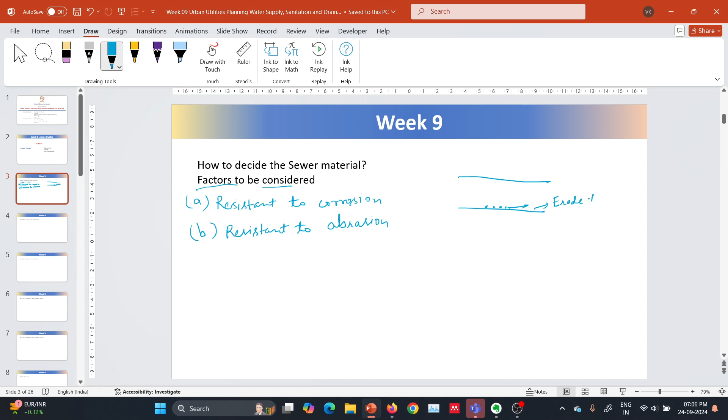resistant to corrosion, then it should be resistant to abrasion. There are two terms, abrasion and attrition. Abrasion is due to two different materials, and attrition is due to the rubbing of two similar kinds of materials. So it should be resistant to abrasion, meaning it will contain some solids, and these solids may erode the sewer material.

It should be strong and durable. Apart from that, it should be preferably lightweight, for ease of transportation. And then it should be impervious. It should have low cost. And apart from that, it should be hydraulically efficient.

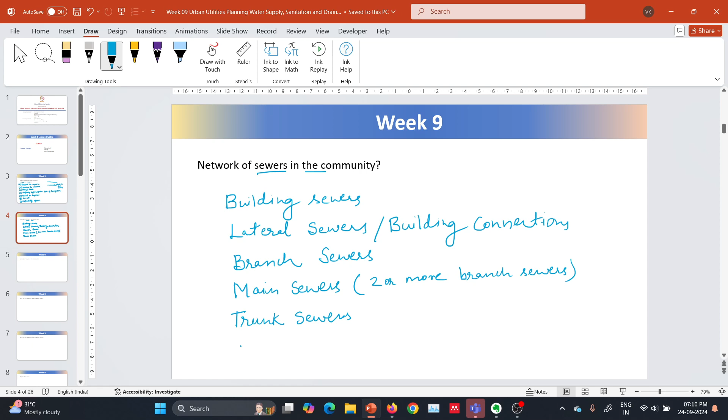The networks are like this: first we have sewers in the building, called building sewers. Then we have lateral sewers, or building connections. Then we have branch sewers. Then we have main sewers, which will connect two or more branch sewers. Then we have trunk sewer, and then they will either discharge to STP or outfall.

We can illustrate them like this: this is a house. From these households, you will have lateral sewers, also called building connections, connecting the house to the system.

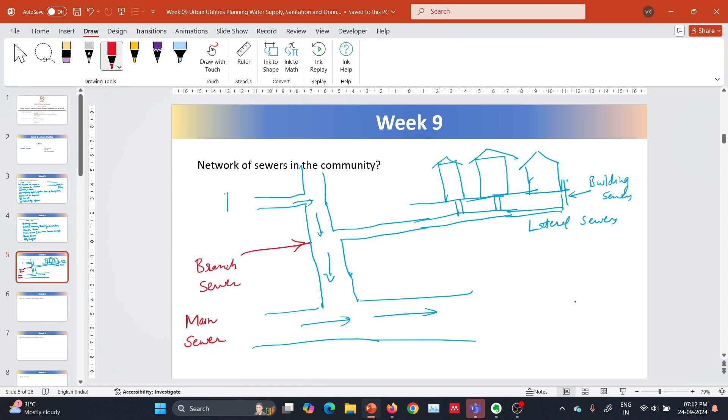The lateral sewer will actually connect to the branch sewer. This branch sewer will then connect to one big main sewer. The main sewer then transfers the content or sewage to the trunk sewer, which will discharge either to the STP or outfall. This is the network of sewers in the community - this is main sewer, these are laterals.

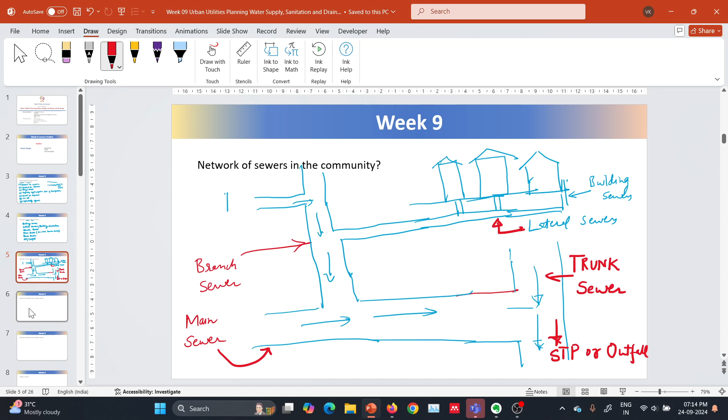Now we can move on to the next question: what are the different forces acting on the sewers? Sewers can have different types of forces. Sewers are generally circular in shape and size, and if we consider them as a 3D figure, they are cylindrical in shape.

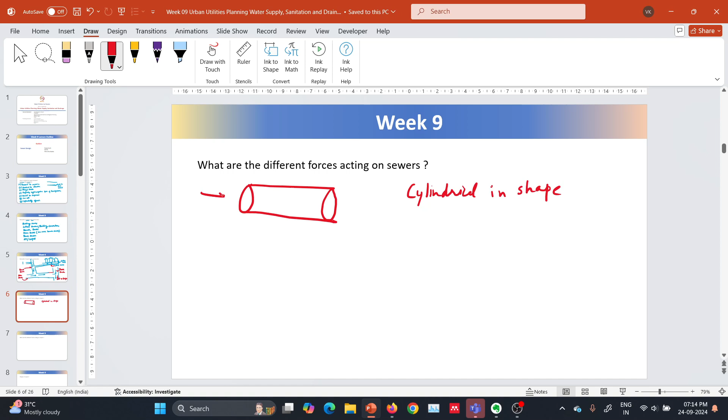So they can have internal pressure when running full. Generally sewers are not designed to run full, but due to overflow or unforeseen circumstances, they may run full and cause internal pressure. So we have to provide the provision - we need sewer material of such strength that it can bear the internal pressure due to full flow.

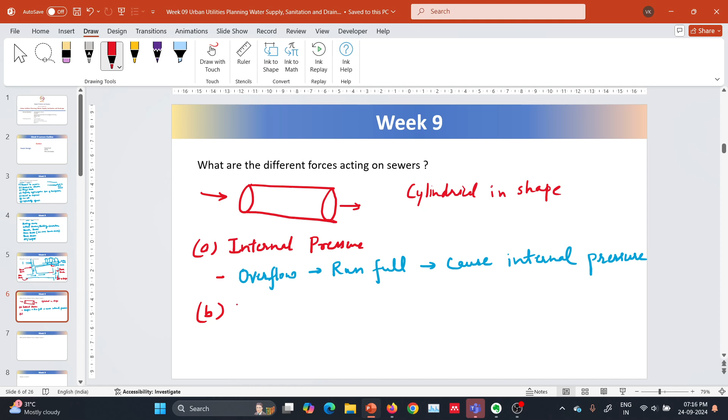The second type of force is pressure due to external load.

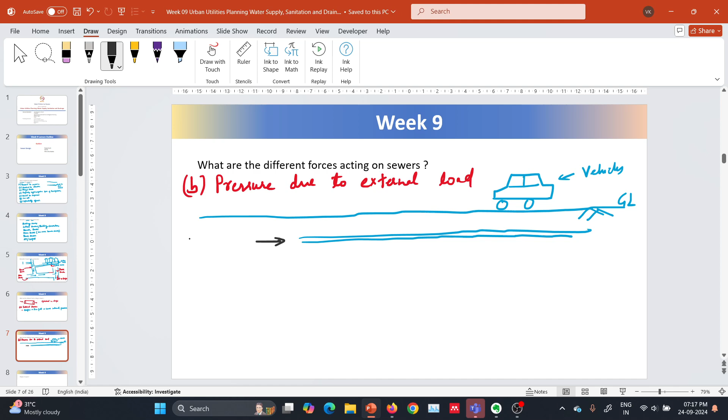Sewers are, as we discussed in the last class - this is the ground level. Here we can have vehicles, and we can have water lines above, which are water supply lines, and we have sewer lines below this.

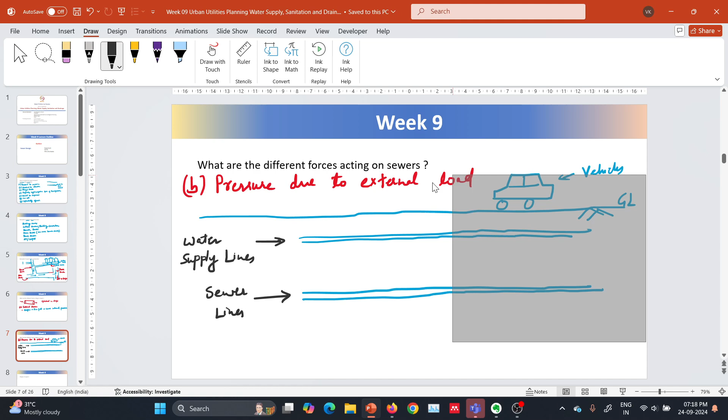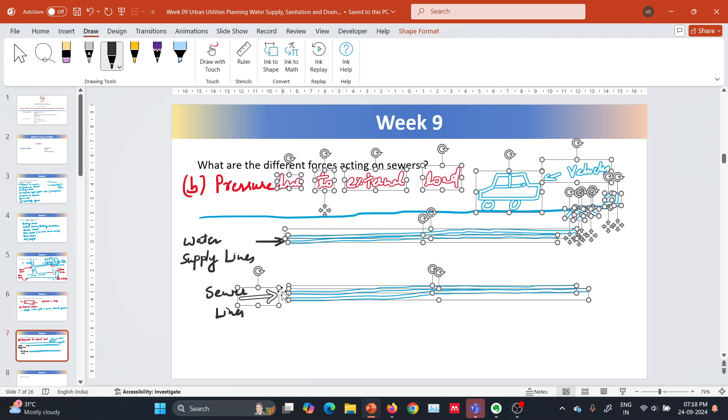So sewers have to carry loads. This is due to the earth pressure, soil weight, plus the vehicle load. So sewers have to carry soil weight plus vehicular load. Sewer pipelines need to be designed to take external load because of the soil weight and the vehicle movement.

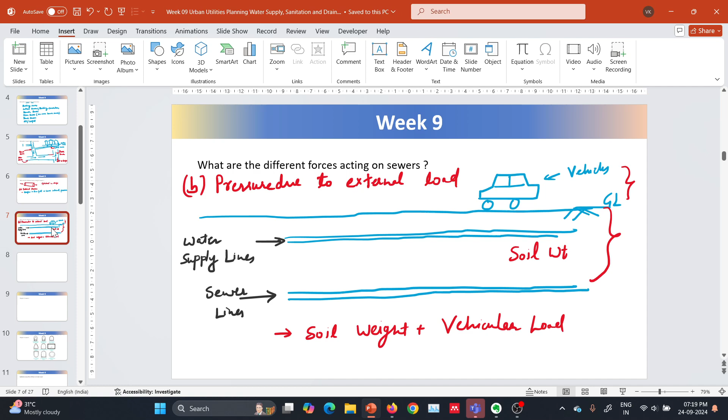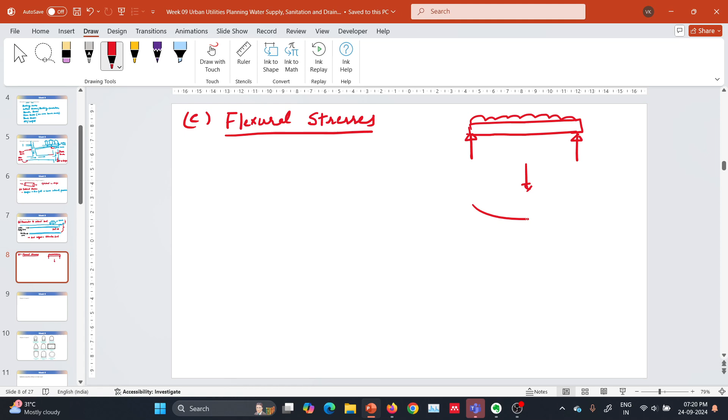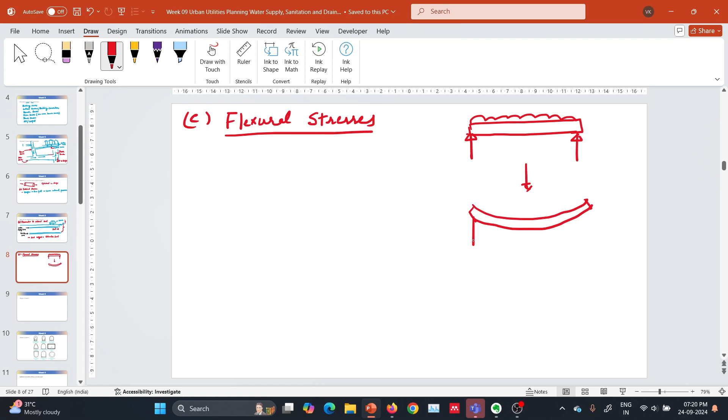We have two more stresses. These are flexural stresses. So what are flexural stresses? In solid mechanics we studied, if you place a beam with some load, it will bend like this. Not exactly like this, but very little. So it will bend.

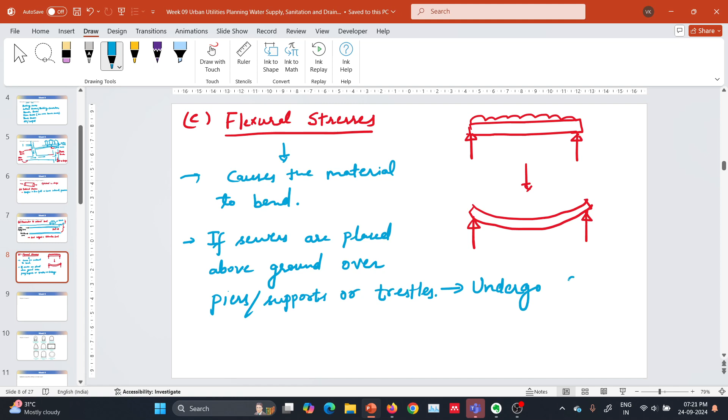Likewise, if sewers are placed above ground over piers, supports, or trestles, they undergo flexural stresses. So the sewer pipelines, they can bend, and here cracks may develop. That will reduce its life. So that's why they should be designed to take the flexural stresses if they are placed above the ground.

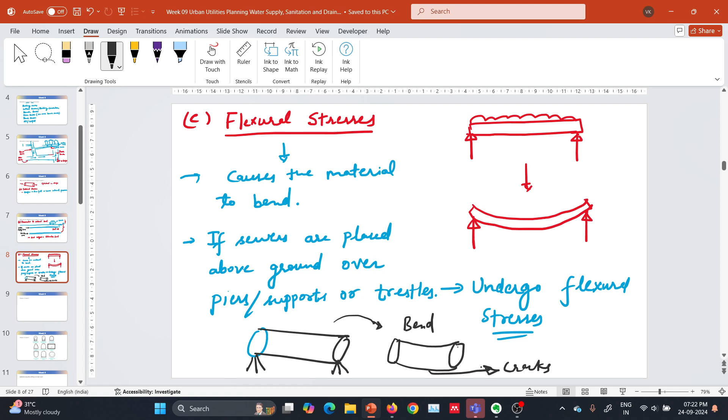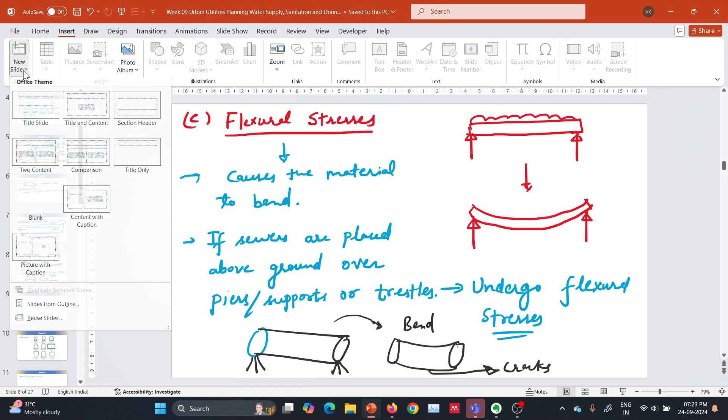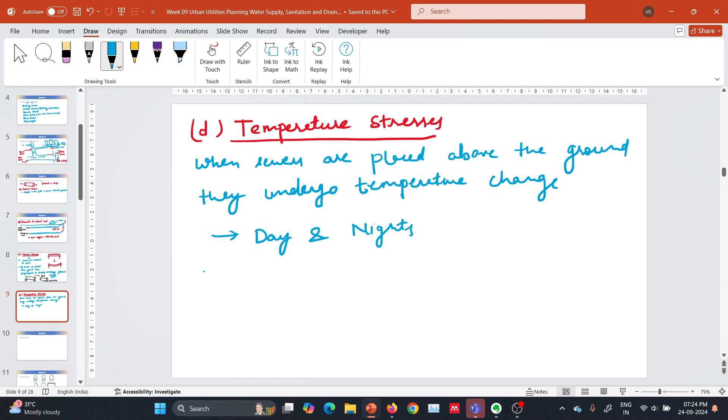So we have one more stress, that is temperature stress. So when sewers are placed above the ground, they undergo temperature change during day and nights, during summers and winters. So they undergo change in temperature, and that temperature, what will it cause?

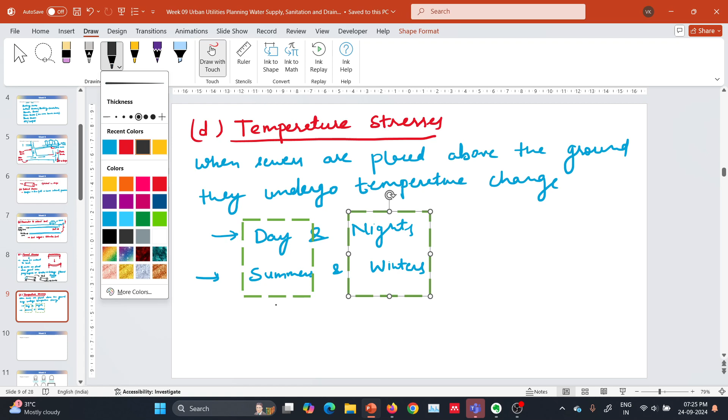So during summer they will expansion, during nights and winters contraction. So this repeated cycle will affect the material, and the life of the material will reduce. That's why the sewer material should be such that it can bear the temperature variation during day and night, and summers and winters.

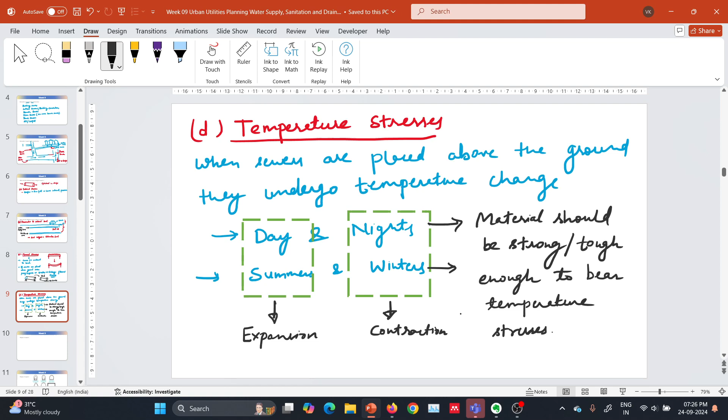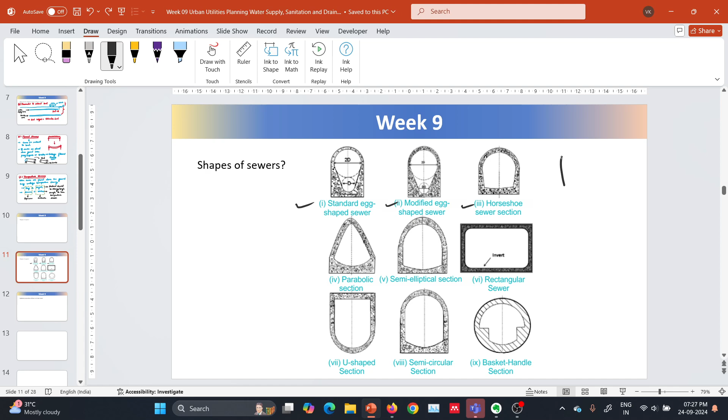What are the different shapes of sewers? We have different shapes: standard egg-shaped sewers, modified egg-shaped sewers, horseshoe sewer section - this looks like horseshoe. This is parabolic section, semi-elliptical section, rectangular sewer, U-shaped section, semicircular section, and basket handle section. And there is one more which is most important, the circular sewer.

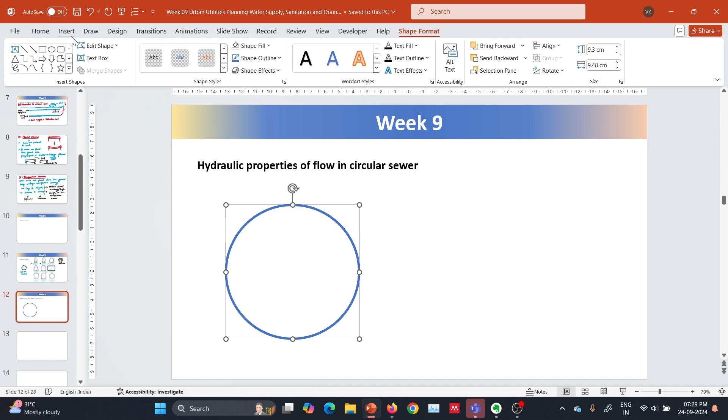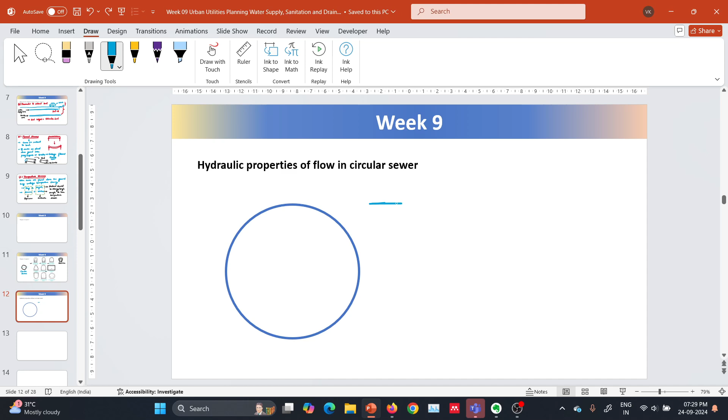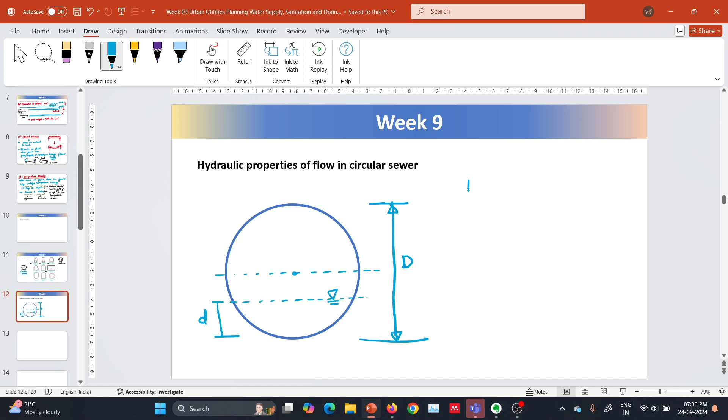Now we will understand the hydraulic properties of circular sewer. So this is the diameter of the sewer, this is D. This is the flow depth - depth of flow in sewer. Alpha is this angle, this is alpha by 2. This was D by 2, this is alpha by 2.

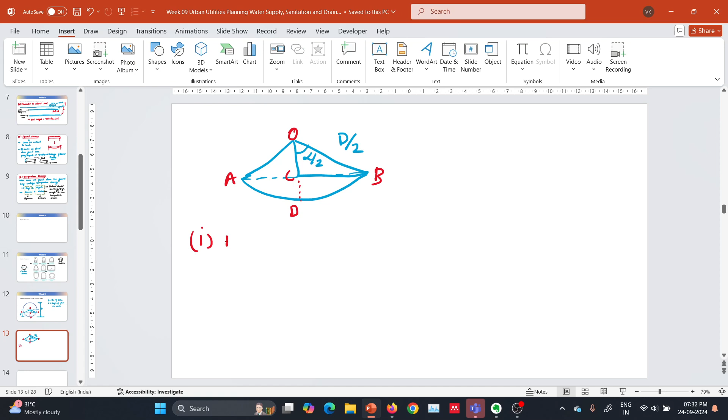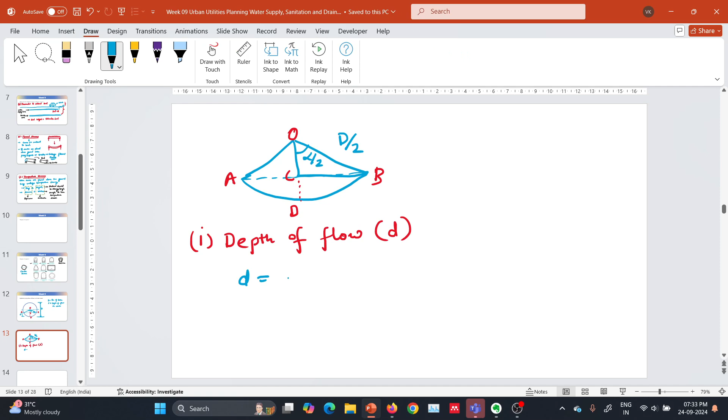So we can write these sections as O, A, B, this is C, this is D. First we will calculate depth of flow, which is d. Depth of flow we can calculate as total minus D by 2 minus OC. This d will be equal to D minus D by 2 minus OC. This is OC length.

This OC is equal to D by 2 cos alpha by 2, and CB is equal to D by 2 sin alpha by 2. So if I write it like this, D minus D by 2 is D by 2, OC is D by 2 cos alpha by 2. So here I can write d by D is equals to 1 minus cos alpha by 2, divided by 2. This is the expression for the depth of flow.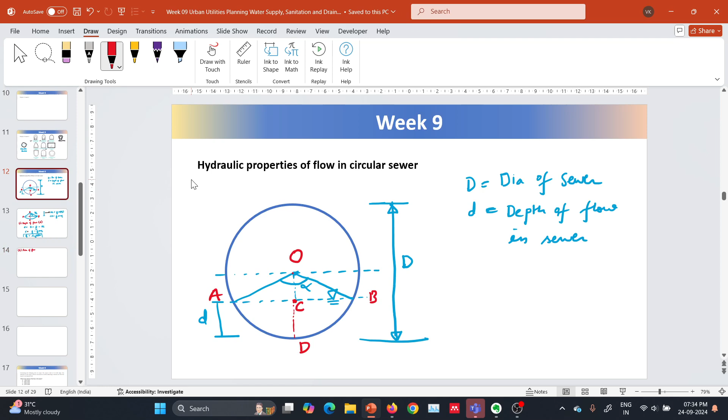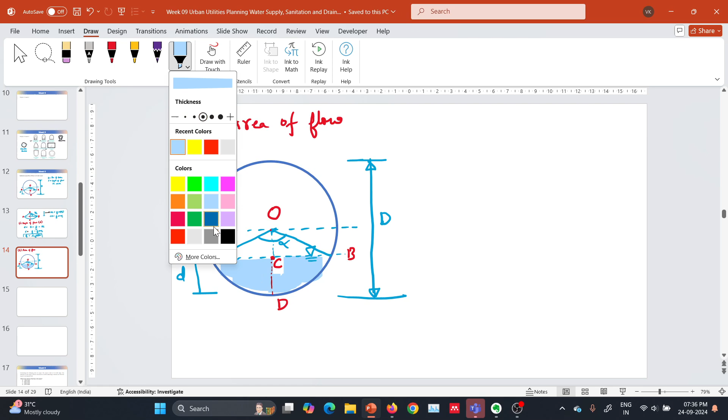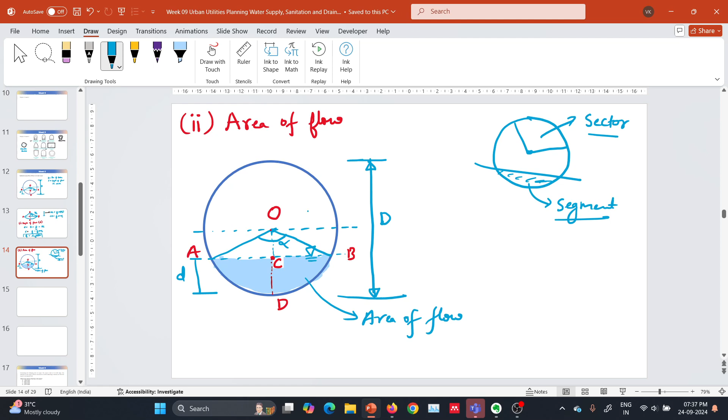Now we will derive it for area of flow. This is the area of flow. So remember two things: this is called sector and this is called segment. These are the two things we need to consider. This is sector, this is segment. So the area of sector first we'll calculate, then we subtract the area of triangle, and from this sector, if we subtract this triangle, we'll get the segment. The area of flow is area of sector minus area of this triangle.

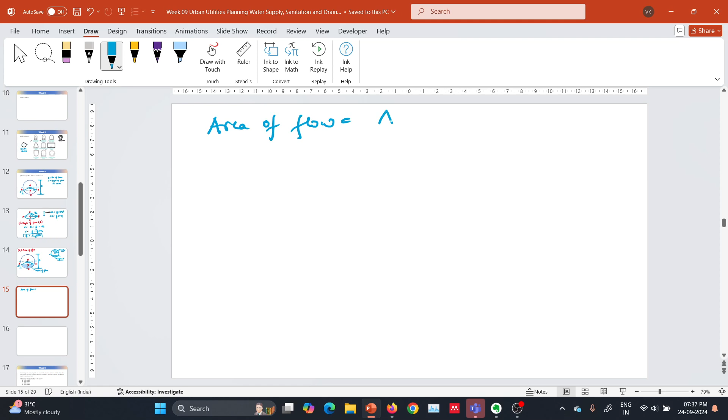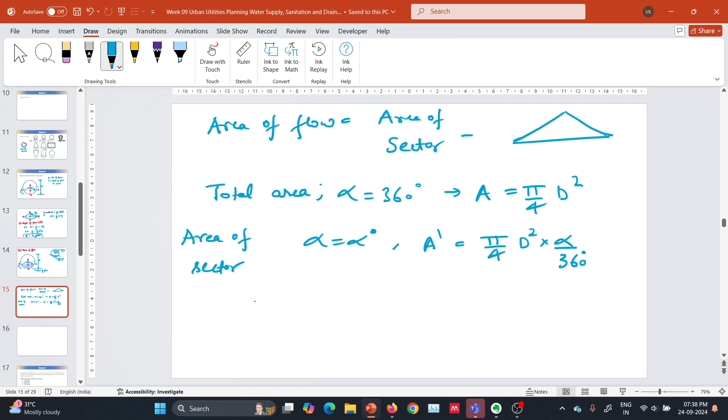So the total area, when alpha is 360 degree, area is A, which is pi by 4 d square. When alpha is alpha degree, area is... not A, it's A dash. This is area of sector. A dash is pi by 4 d square into alpha by 360 degree. And area of flow will be - area of flow means area of segment. Area of flow is area of sector, which is pi by 4 d square into alpha by 360, minus area of triangle.

So this whole area will be half into base. Base is how much? Base is AB, so half into AB into OC. Let's write one more thing: AB is how much? AB will be D sine alpha by 2. So it's half into AB into OC.

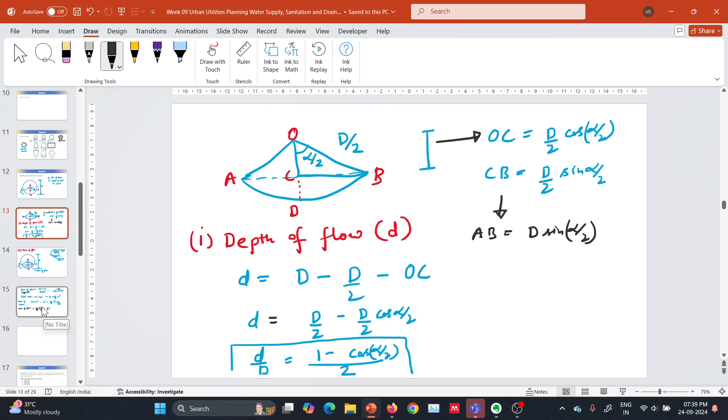Half into AB into OC. So it will come out as half into AB will be d sine alpha by 2, and OC will be d by 2 cos alpha by 2.

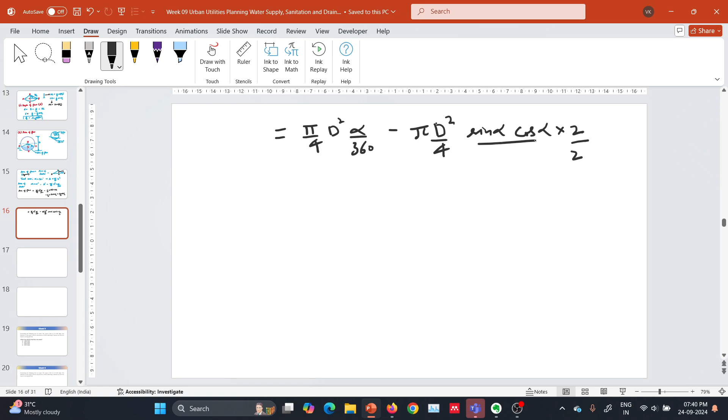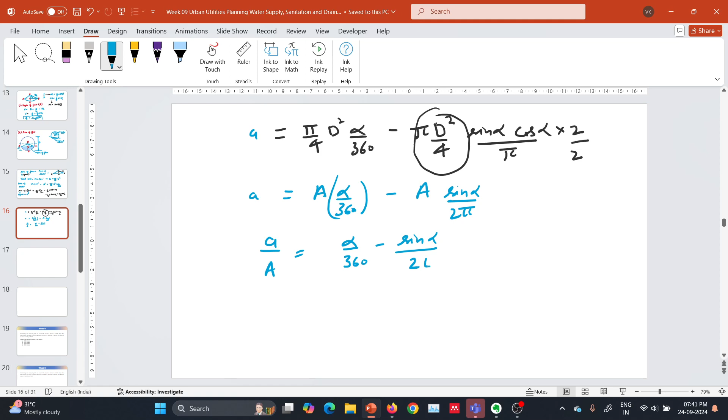is small a. A into alpha by 360 minus a sin alpha by 2 pi. This is small a. Small a by capital A is alpha by 360 minus sin alpha by 2 pi. This is the area of flow.

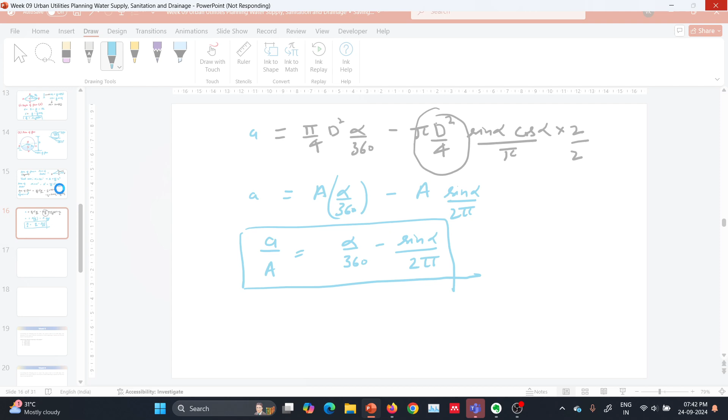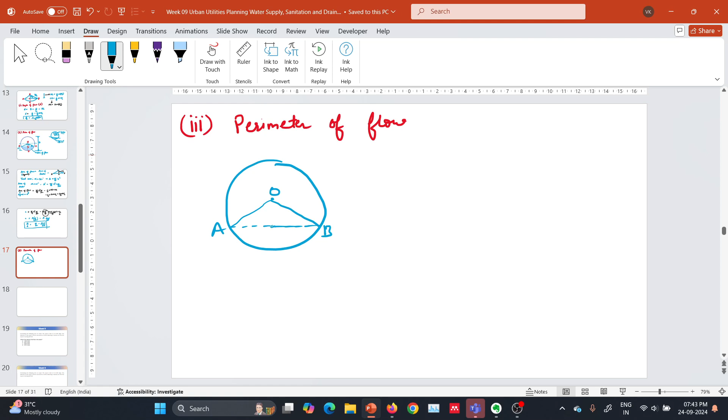Third, we will understand about perimeter. A, B, C, it is D. So perimeter will be this much. The perimeter. So total perimeter is P is pi d.

For alpha is equals to alpha degree, small perimeter will be pi d alpha by, this is angle total alpha by 360 degree. So small p by capital P will be alpha by 360 degree.

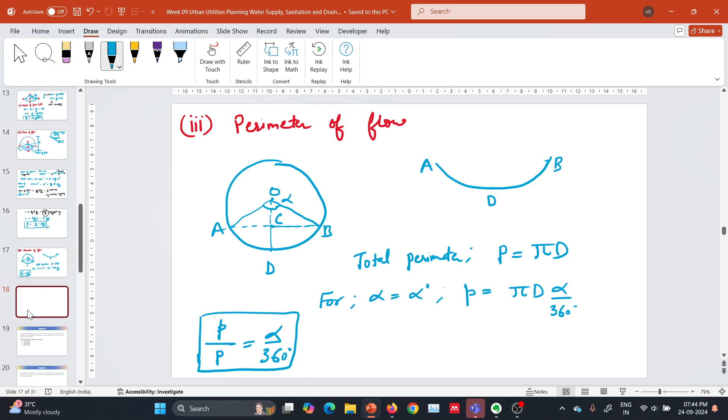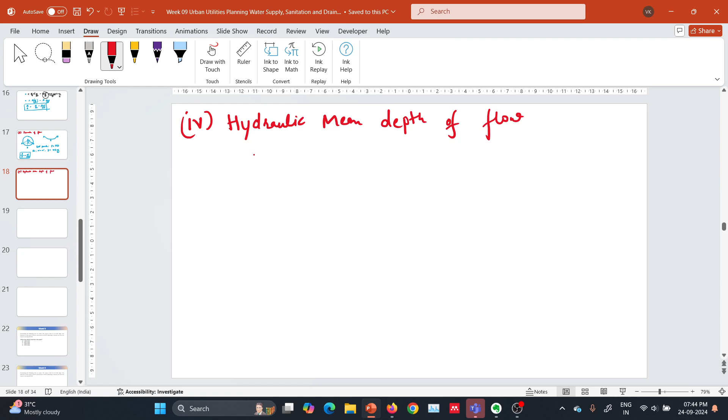Then now we'll calculate hydraulic mean depth of flow. That is R. Hydraulic mean depth is area of flow by wetted perimeter.

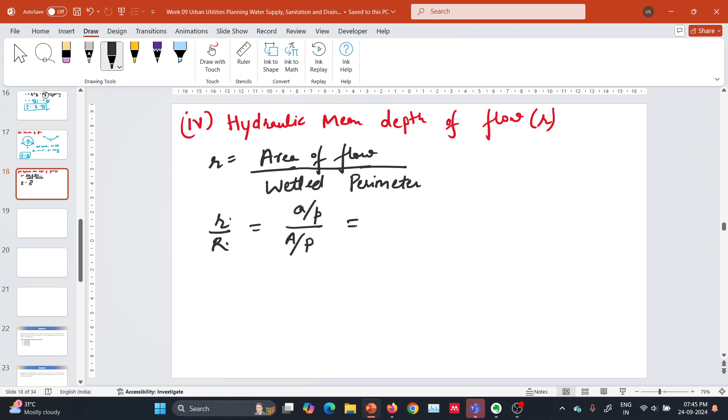So this can be calculated like R by R. This R means when it is flowing full. This when it is flowing partial. So R is equals to small a by small p, capital A by capital P. It can be written as small a by capital A and small p by capital P. So it will come out as alpha by 360 degree minus sine alpha by 2 pi divided by alpha by 360 degree.

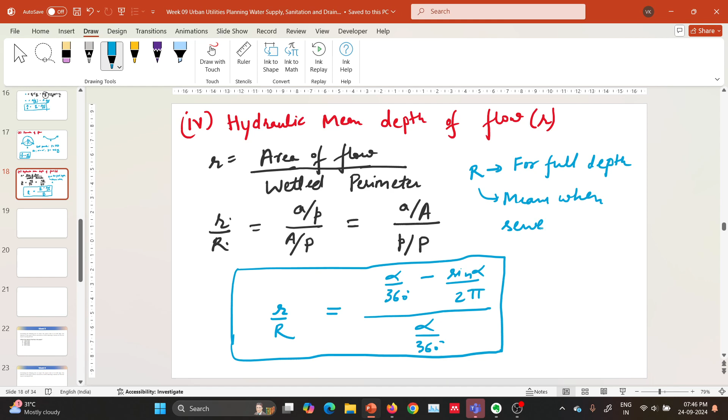This R for full. Sewer is flowing full.

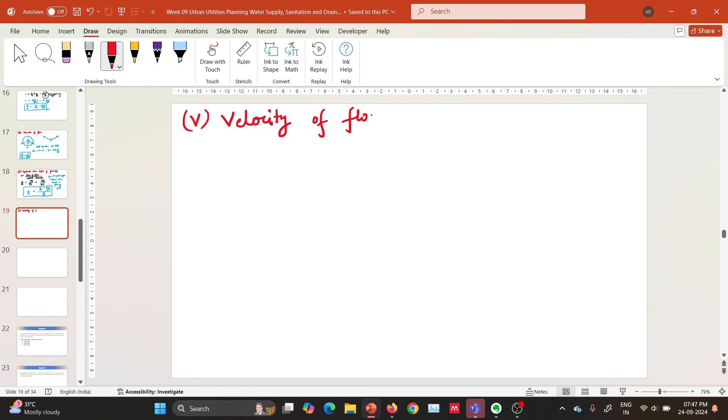Fifth is velocity of flow. So we know the velocities can be written in the form of Manning's formula. V is equals to 1 upon n, r to the power 2 by 3, s to the power 1 by 2. So n actually varies with the depth, but we are assuming it as constant. In general,

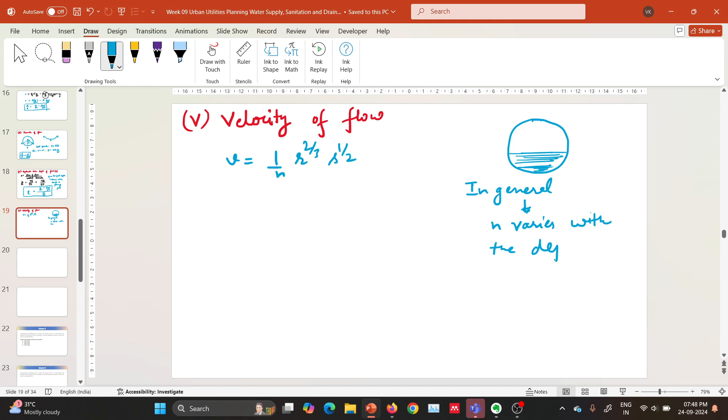n varies with the depth, but assumed as constant because there is not much change, and depends upon the pipe material.

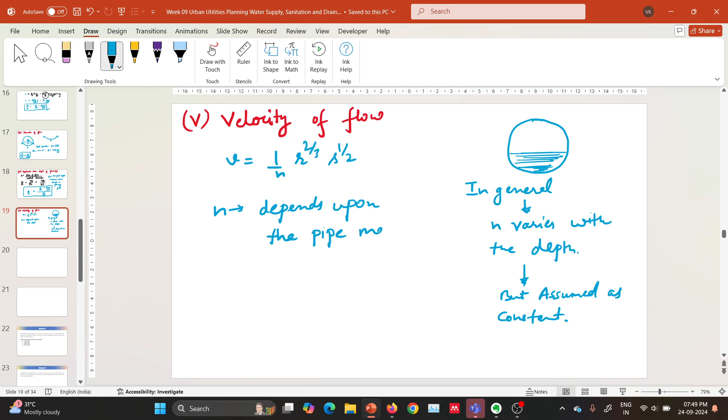small v by capital V is equals to small r by capital R to the power 2 by 3. That means V by capital V is equal to alpha by 360 minus sine alpha by 2 pi divided by alpha by 360, divided to the power 2 by 3. So this is the velocity of flow.

Similarly, we can calculate the rate of flow. Rate of flow, or we can say discharge. So that is Q by capital Q.

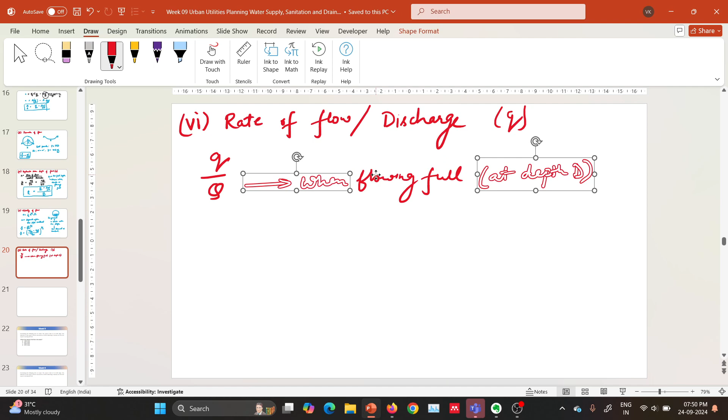When flowing full at depth.

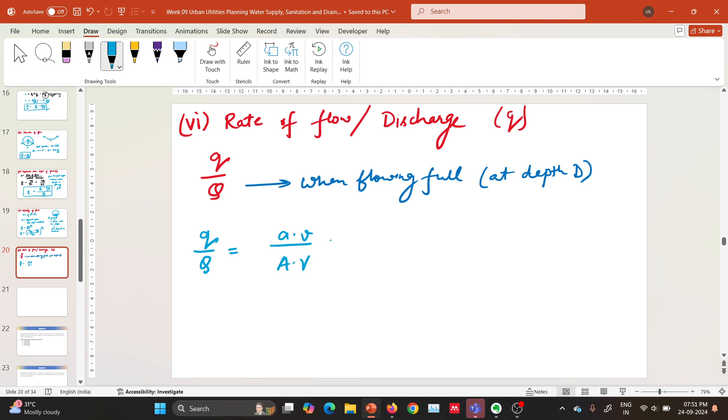So small a by capital A is area. Area is alpha by 360 degree minus sine alpha by 2 pi into alpha by 360 degree minus sine alpha by 2 pi, divided by alpha by 360 degree to the power 2 by 3. So this is q by capital Q, small q by capital Q.

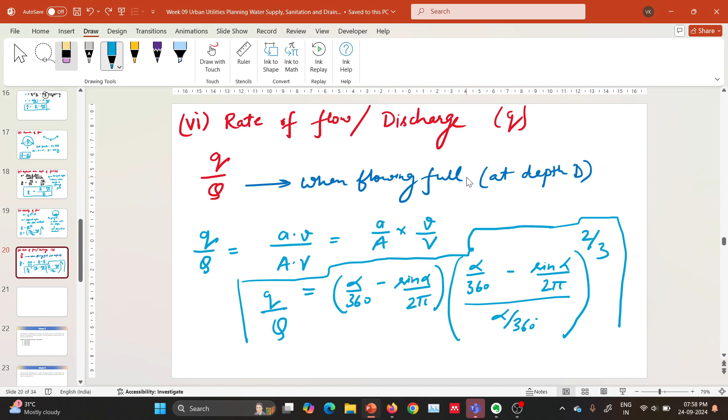So this is the q by Q value, and we have two little things which is maximum velocity of flow. So for getting maximum velocity, we will find at what angle we will get the maximum velocity, that we need to calculate.

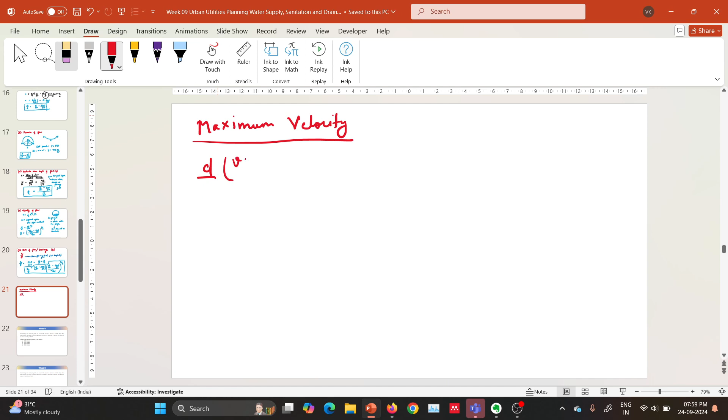So d by small v by capital V divided by d alpha, we will differentiate it and put it equal to 0. So we will get some alpha. That alpha, you will get it as 257.5 degrees, and d you will get it as 0.81 of D. This is for maximum velocity.

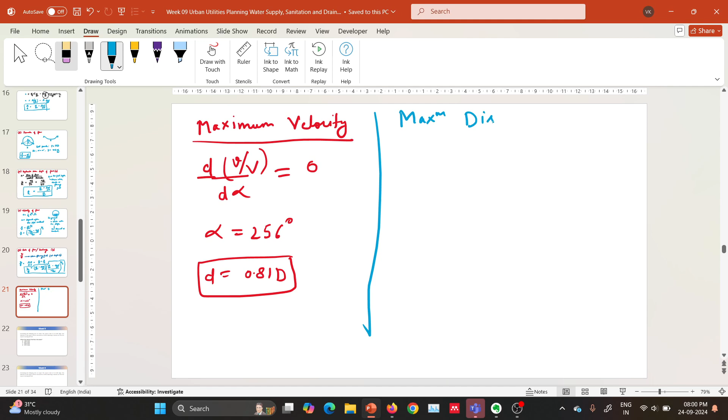And for maximum discharge, similarly you can calculate maximum discharge. We will keep dQ by Q with respect to alpha equals to 0, for Q max. So you will get alpha as 308 degrees, and d you will get as

0.95 of d. So it is here to show that the maximum velocity is not at the full depth of flow, but it is at this depth, and the maximum flow is not at the full depth, but it is at 0.95 of the diameter. So these are the Vmax and Qmax.

Now we can solve some MCQs. Considering the following data on a sewer, the sewer is laid at a slope of 1 by 400 and the diameter of the sewer is 160 cm. The dia is 160 cm, sorry, 1.6 meter we can write. N is 0.015. So the Manning formula we have to use, and the sewer is running half full.

Even though the sewer runs half full or fully at full depth, so the R will be A by P.

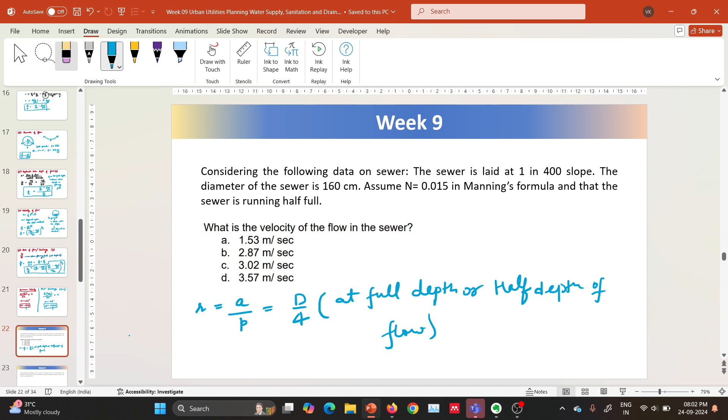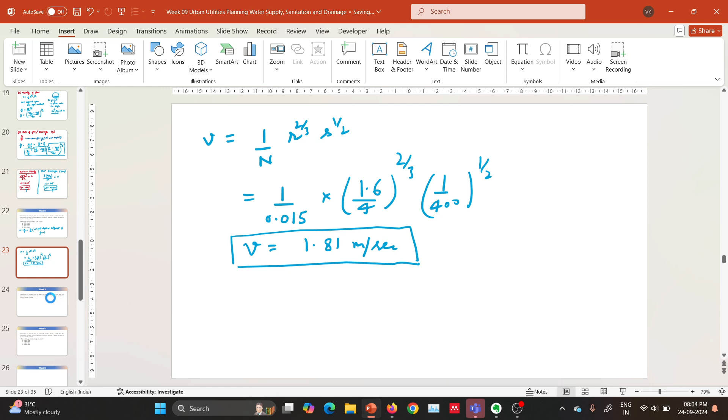So no MCQ is correct.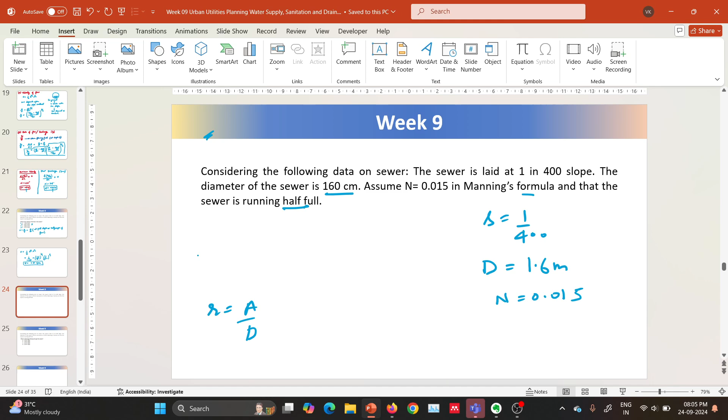Second question is, what is the discharge through the sewer? So we need to calculate discharge. The discharge is area into velocity. So sewer is running half full. So the area, discharge is, rather I will try to write it as pi by 4 D square divided by 2.

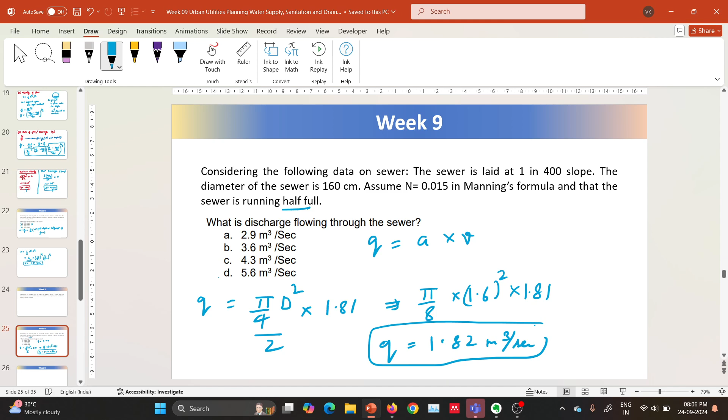Now let me check once more. pi divided by 8. Yeah, we are getting discharge 1.82 meter cube per second.

We have one more question, similar to this. A circular sewer of diameter 0.6 meter and the slope is 1 in 250. The Manning's coefficient is 0.015. The flow is full actually. What would be the velocity and discharge of the flow in meter per second? So we'll just calculate velocity and then we can calculate discharge.

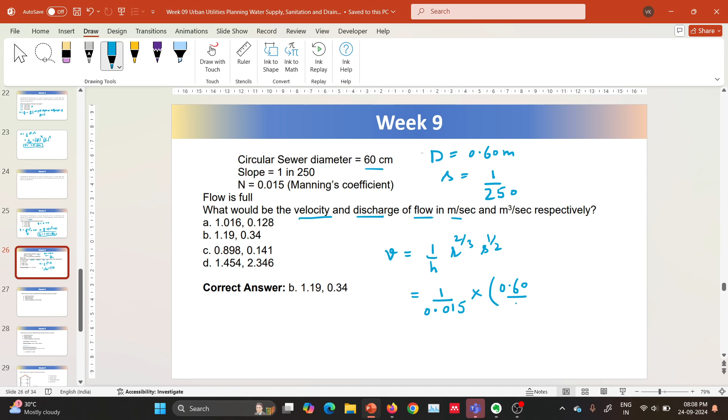V is equals to 1 upon N, R to the power 2 by 3, S to the power 1 by 2, and N is 0.015 into R to the power 2 by 3, R is D by 4, that is 0.60 divided by 4 to the power 2 by 3, and S to the power 1 by 2.

And discharge we can calculate it as area into velocity.

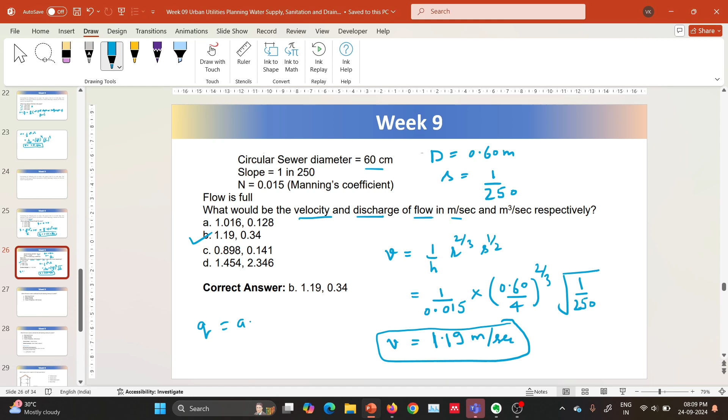Which formula is used to estimate the self-cleansing velocity? So for self-cleansing velocity we use the Shields formula. The Shield formula is used for self-cleansing velocity.

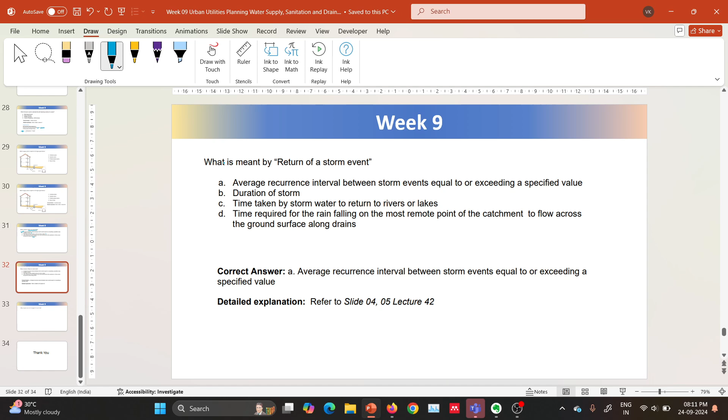Why are sewers not designed to run full? So the sewers are not designed to run full because extra water may come due to rainfall.

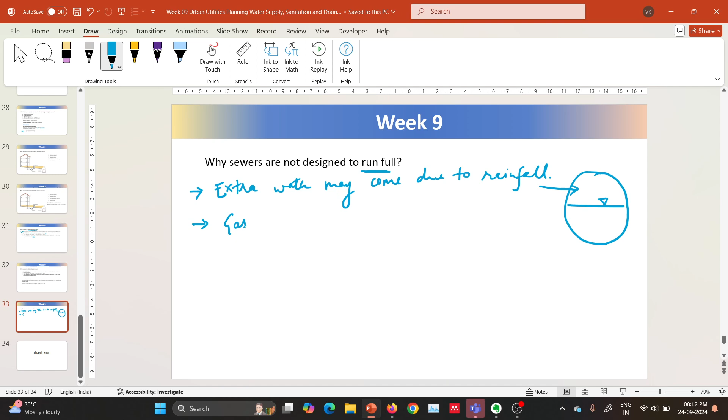So to cater for that, the sewers are not designed full, because if extra water comes, it can be accommodated in the above part of this sewer section. That's why these are not designed for full flow depth. And apart from that, it can channelize a gas flow, which can be channelized. That's why the sewers are not designed to run at full depth. And if we design them for full depth, then during the rainfall it can cause extra pressure on the sewers and the sewers may burst. That's why sewers are not designed to flow at full depth.